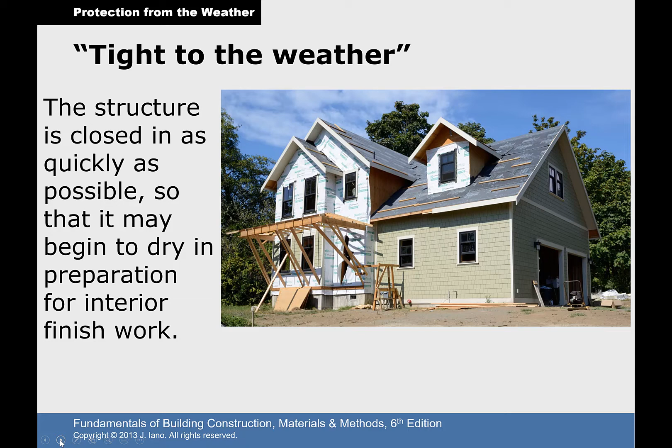Once we have all of our exterior sheathing on, which is our OSB, typically, what we'll do is we'll start with the roof and work our way down. Sometimes it really depends on who you work for, but typically before we put a shingle on a roof or any type of roofing material, we need to have an underlayment. And roofing underlayment is installed first, and that provides temporary protection from rain until the finished roof covering is installed.

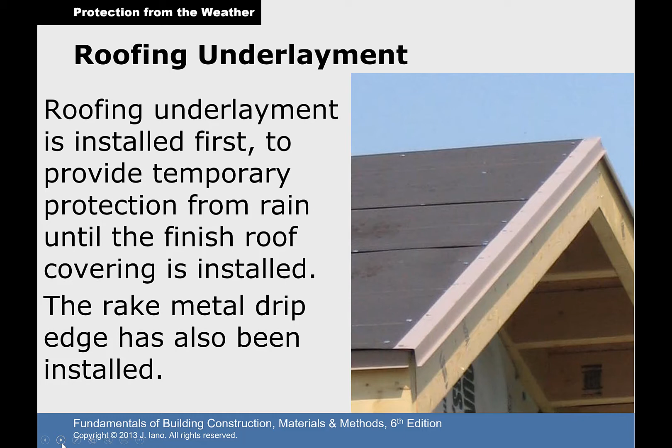And then you'll notice along the edge of this picture here, right here, you'll see that there is a metal drip edge along the rake, which is the diagonal angle of that roof, and that helps shed water away from the structure.

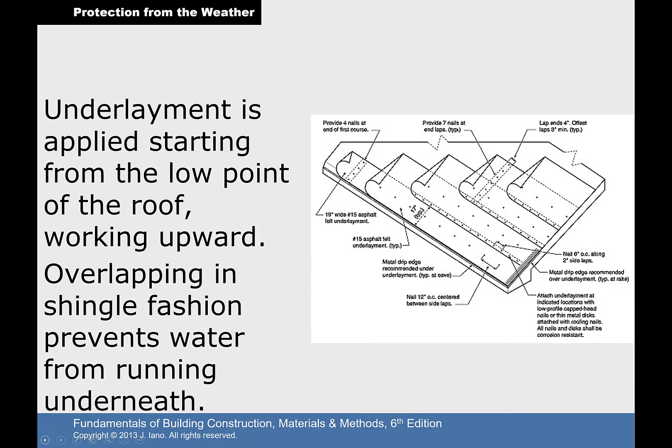So here's a little graphic of underlayment and how it's applied, and you always start from the bottom up with exterior finished materials. So for underlayment, you'll start at the low point of the roof, the bottom part, and work your way up toward the peak. We overlap our underlayment in a shingled fashion, and that helps to keep water from running underneath that underlayment and getting that sheathing wet again, which we're trying to avoid.

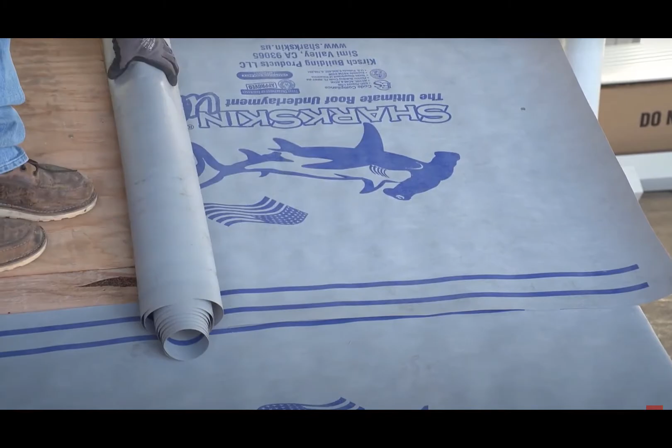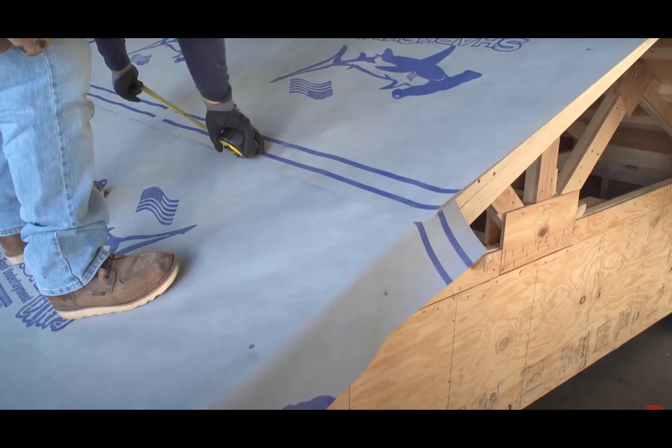Underlayment should be placed in an overlapping fashion. The second piece should lay on top of the first strip by lining up the edge with the guideline as shown. Sharkskin can be installed with the logo running up or down. Overlaps should run with the flow of water. Cap nails should be placed along the seam every 2 feet along the guideline.

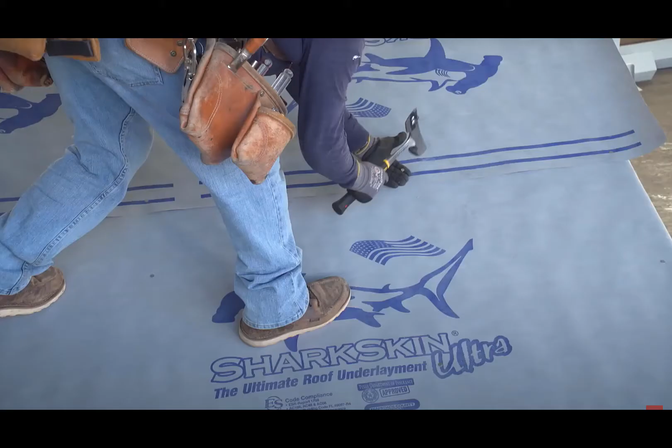A lot of times you'll hear the term roofing felt, and that's our traditional underlayment for roofing materials, but you could also use newer synthetic sheet materials like you see here in this picture. And then here's a little tidbit on different types of roofing underlayments and how it is installed.

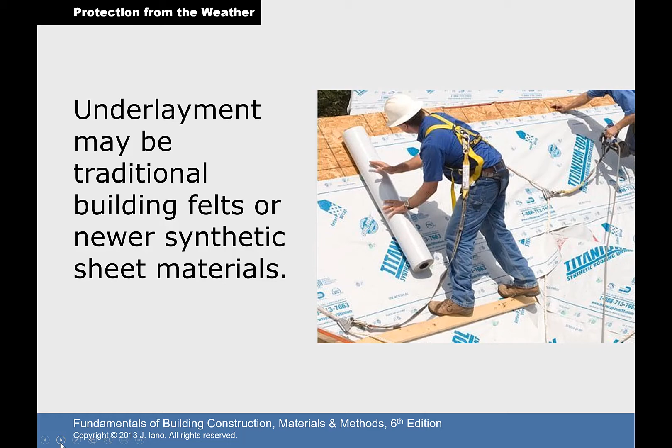So before we get into the different types of underlayments we have here, let's talk about the purpose of underlayments. So underlayments are basically what the name implies. It's an underlayment for the final product. So in the case of these three, these are all shingle underlayments. These go between the shingles and the roof deck, or where the plywood or one-by decking is. This is a barrier, a second layer of protection basically, if something were to happen to the shingles.

All right, a couple of other ones, you've got ice and water shield and some sticky membranes. They serve a slightly different purpose, but overall, every single product here is a waterproofing product. It's part of a proper roofing system. So let's begin with the basics. Let's go a little old school for a second. So these two rolls are what is called asphalt felt tar paper.

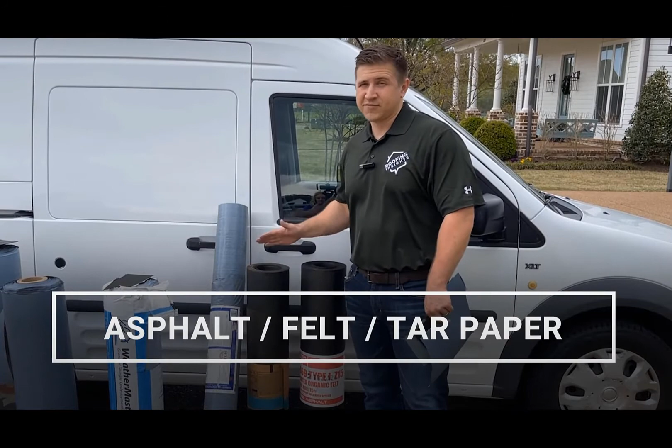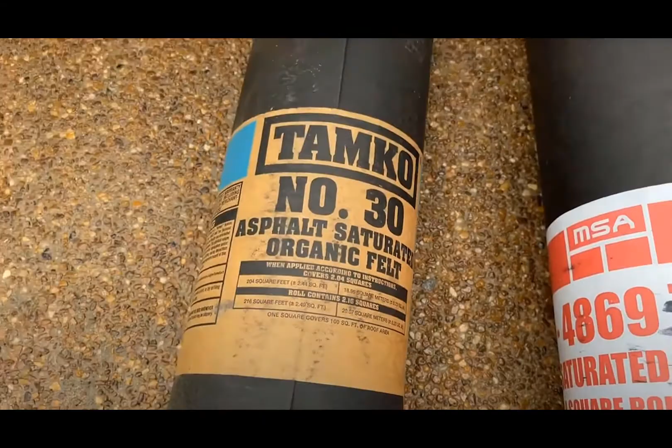Actually, there's a ton of different names for them, but this is one of the oldest forms of underlayment that's still around. This is basically made out of wood pulp and other organic materials ground together to make paper essentially, and then it's coated with an asphalt layer. And what the asphalt does is help the water to shed off so it doesn't absorb water. But these two products, you're not seeing a lot of roofing companies install. Occasionally you'll see them because they have pretty much been replaced by this right here.

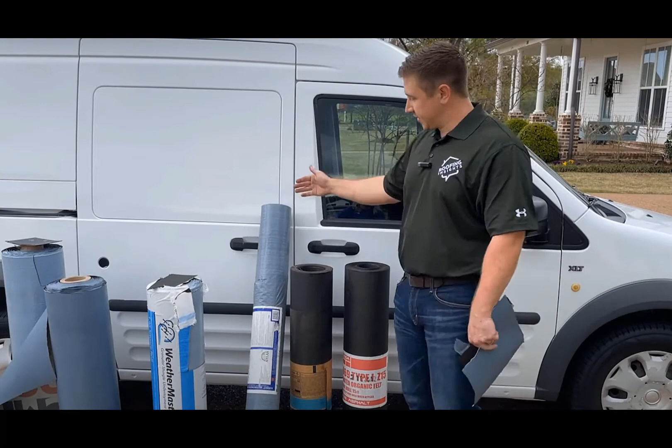This is called synthetic felt, synthetic underlayment. Tons of different names again, but this is a polypropylene synthetic membrane. It does the same thing. You can tell that this is actually quite larger, but the benefits of using this over this type of felt paper, first of all, this is a lot stronger.

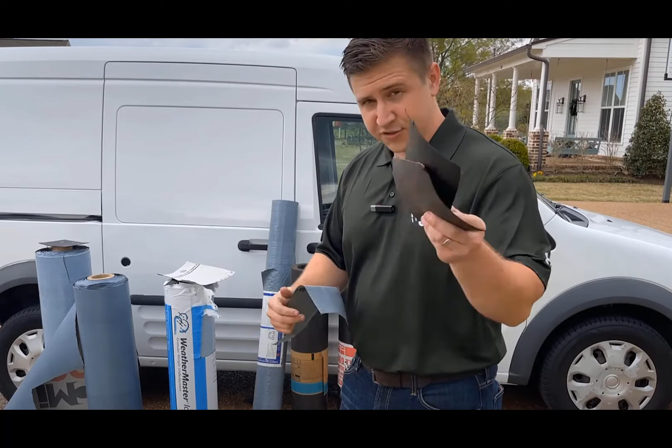And to demonstrate that, I actually have some samples here. This is the 30-pound felt, and here's your 15-pound felt. So I'm just going to put them together and just show you how easily these tear. Tore just like paper. Here we have synthetic felt. One layer, it's even thinner.

Took a lot to tear that. This was almost as hard as beating Dimitri in arm wrestling.

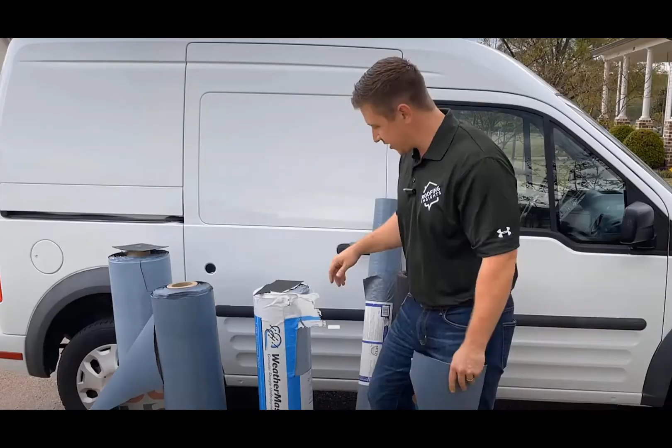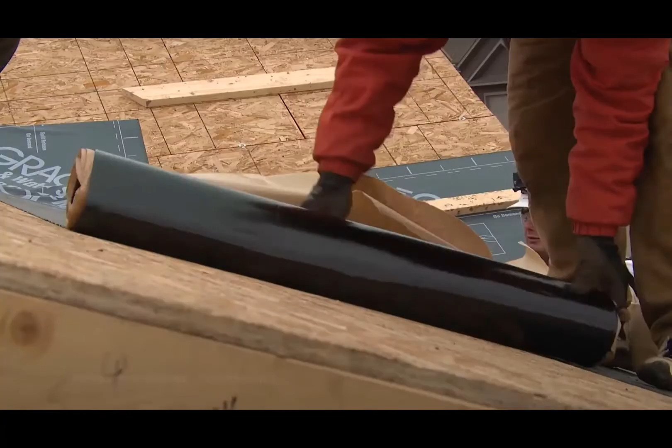These are your main underlayments that you'll find on every shingle roof, or at least you should be finding them there. But let's move on to a little more specific applications. This is what we call ice and water shield. Again, there's a lot of different names for it, but this is a really unique product. So this stuff actually has this plastic here that protects the backside, and the reason this is here is because this is extremely sticky. So the purpose of this underlayment is to actually go in areas that are more prone to leaking. So in valleys of roofs, around chimneys, end walls where the roof meets the wall, that's where you're supposed to put this stuff.

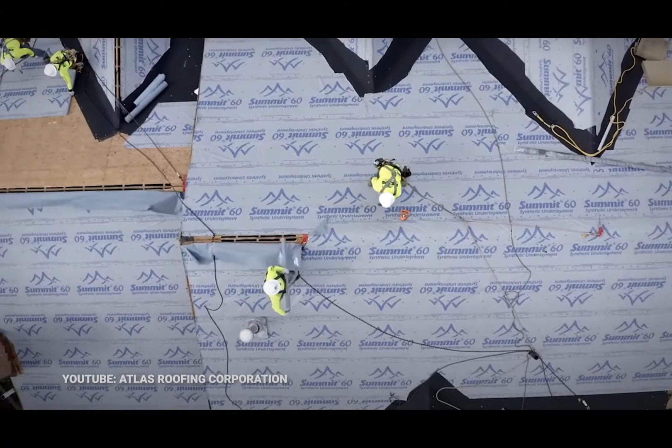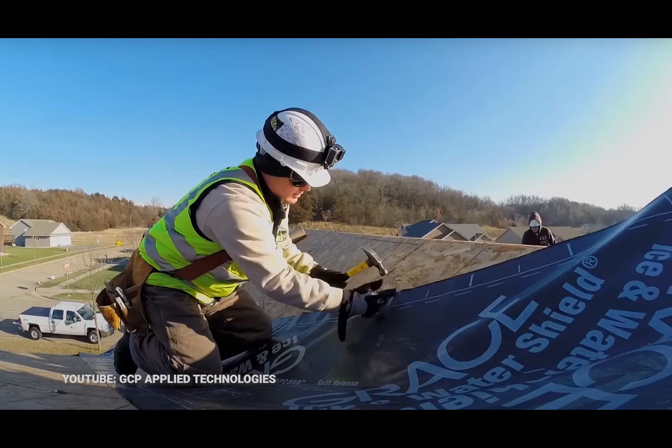And what's so cool about it is that when it heats up, it will stick to the decking really well, making it almost impossible to remove. And any nails that get driven through this product will actually seal around it when it gets hot. It's pretty cool. Now another product that's a step above is called High Temp Ice and Water Shield, and this stuff is actually a completely new brand. I've never seen this before, but you can see it almost looks like synthetic felt on the surface, but you still have that sticky backing, and this stuff is extremely sticky.

This is called High Temperature Ice and Water Shield because you're supposed to use this in areas where it gets extremely hot, like under metal roofs, copper roof, standing seam, that type of thing. I was reading the label of this product too, and they were saying that it's also good with other types of synthetic tiles, clay tile, concrete tile. So this is a really neat product. I probably want to do a video just on this pretty soon because I've never seen this type of style before. And this is actually just like the synthetic felt. It's got a non-slip surface on it. So it's pretty cool.

The final product that I want to talk about, and I consider this an underlayment because it applies directly to the decking, but this is actually part of rolled roofing systems. So rolled roofing are those granulated flat roofs that you see on really low pitched areas. This is called base sheet. You have base and cap. So this actually installs before you put the granulated cap sheet on. And what's really cool about a lot of the products, they actually put markings on it so you can very easily tell where your laps are and your spacing on the cap sheet.

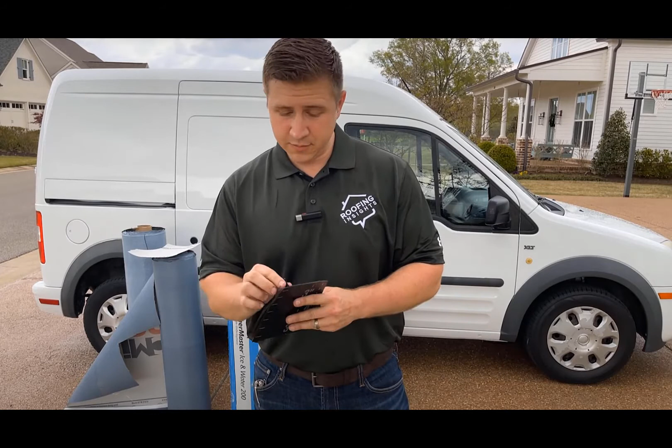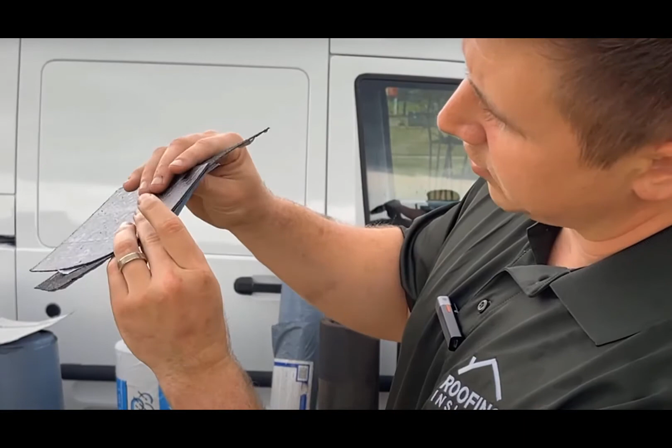But it's pretty similar to ice and water shield actually. Again, you've got the sticky backing. It's just quite a bit thicker. You might be able to see the difference here, but that's a base sheet and that's an ice and water shield. It's roughly, I'd say, twice the thickness of it. There's a lot of other underlayment products out there. When I was talking to my rep to get all this stuff, he was getting real specific with certain things. But in this video, I wanted to cover the common ones that we use on almost every job.

So if we have underlayment installed to protect our roof from getting wet, and it's ready for some shingles or whatever type of roofing material we're going to apply, we also need to do the same thing to our walls. And so we'll look at a wall moisture barrier. And you see in this picture, a lot of people call it Tyvek wrap. That's a brand name. It's made by DuPont. But if you drive around town, you'll also see Lowe's building wrap or Home Depot building wrap, or maybe even a local construction company will have their logo on it. And it all basically does the same thing.

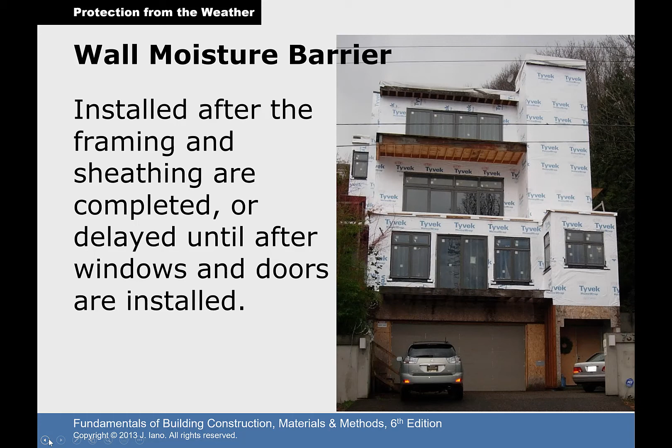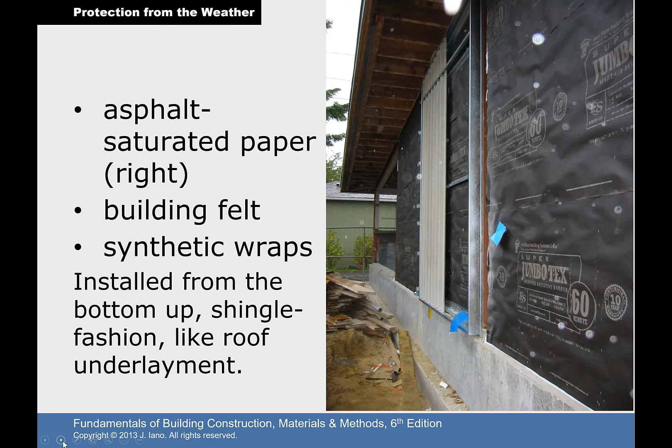It's installed after the framing and sheathing. Sometimes it's delayed until after doors and windows are installed. That really depends on who you work for. So here you see a basic Tyvek wrap or a house wrap that's synthetic, but then there's also other materials as well. This is an asphalt saturated paper, which you see to the right. There's also building felt, similar to roofing felt that we just talked about, or a synthetic wrap like that Tyvek wrap. And just like our roofing underlayment, we always install it from the bottom up, and that keeps water from running behind the underlayment.

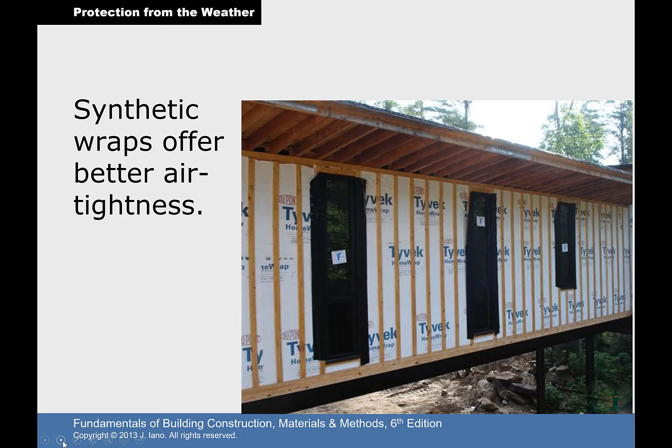Synthetic wraps, like seen here, offer better air tightness, and they're engineered in a way that repels moisture from the outside but it's still breathable. So if water ends up being trapped behind it, there's still the opportunity for that water or moisture to evaporate. So they're usually moisture resistant, but they're breathable. So that means that if there's moisture within the wall, it can diffuse outward, and that way it doesn't become trapped in the wall and cause structural issues down the road.